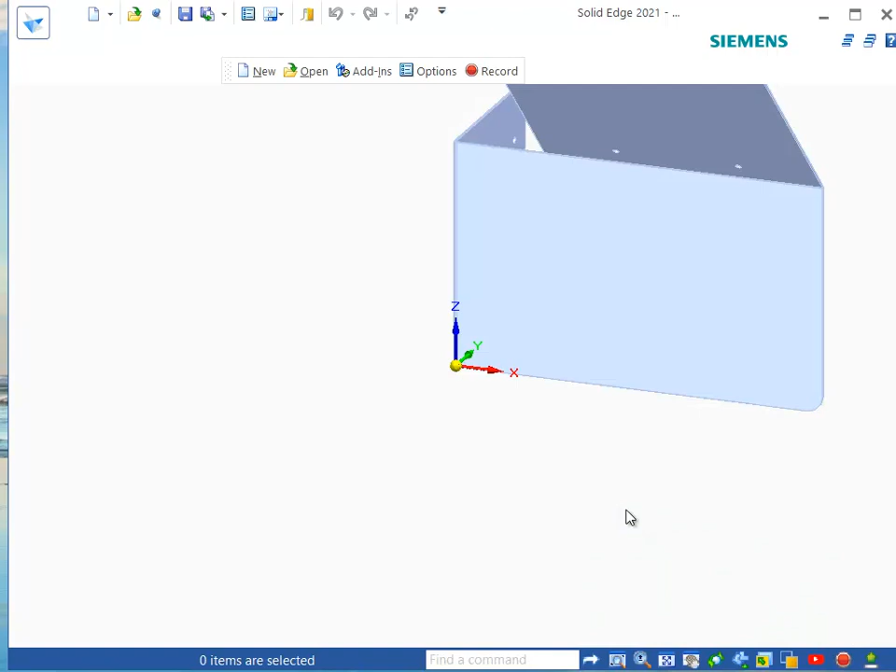Okay, now we got this simple sheet metal part that was created in SolidWorks, brought in through the Parasolid, and now it lands in Synchronous. We can just tell it to make this thin part. We're assuming that it has an equal thickness all the way around.

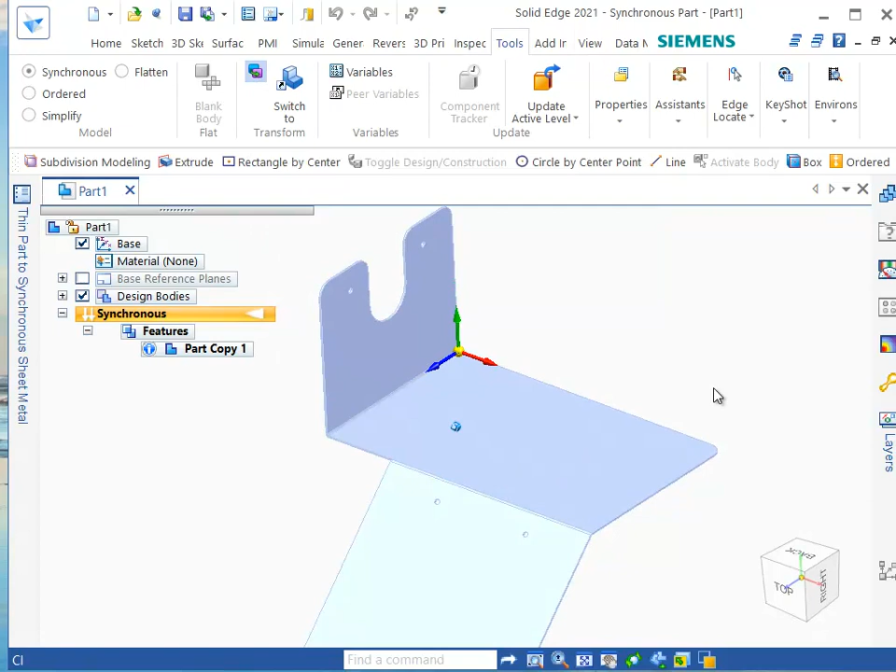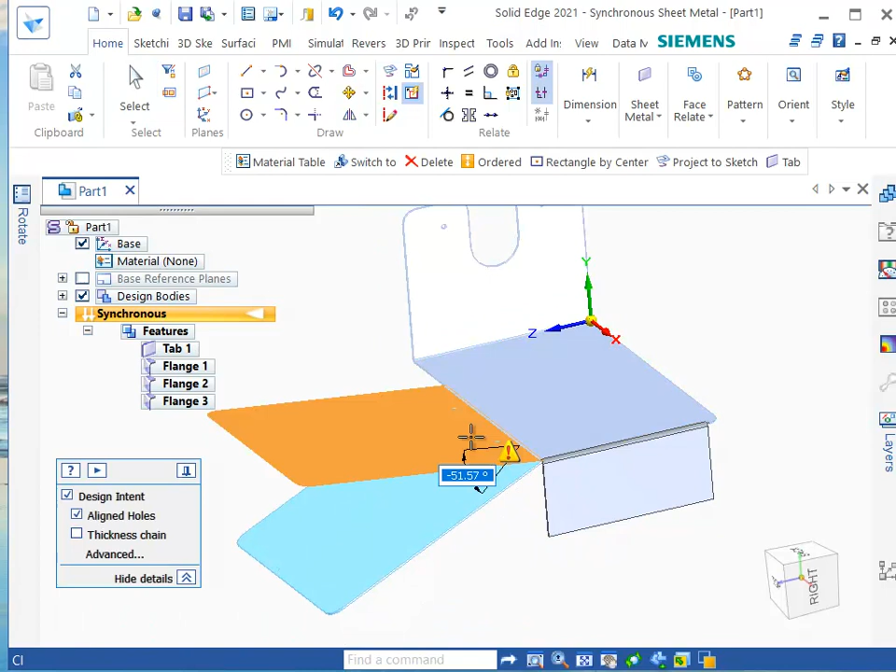Tell it to make it into synchronous sheet metal, and so now we should be able to grab an edge here and pull a flange. Okay, or we can grab a face like this, reorient the steering wheel, and change the direction of the flange. Okay, and the holes go with it.

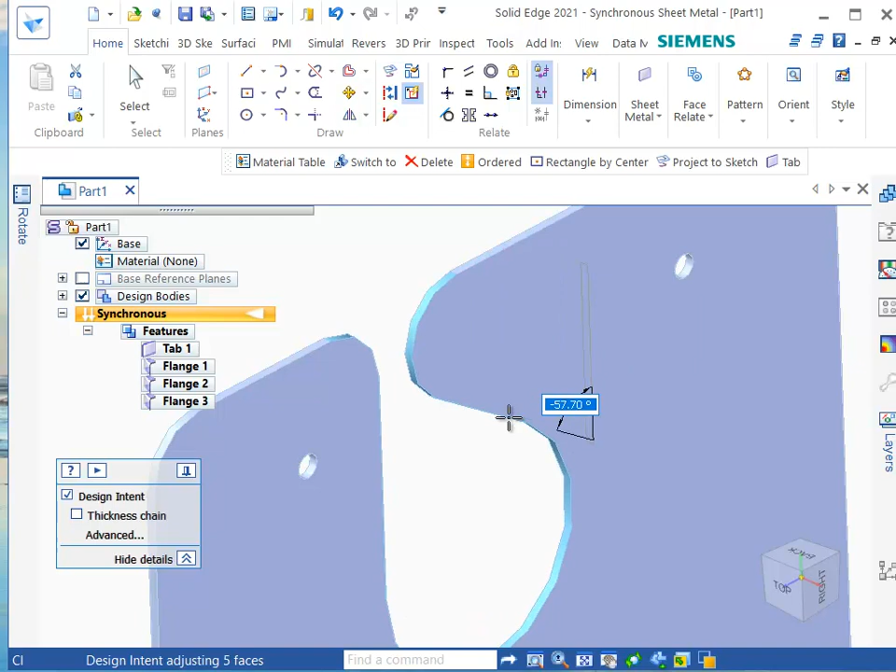Okay, we can make any sort of changes we want to this sheet metal part. We could add a flange there if we want, or what I want to do here is change the angle of this face. You can also change this dimension. So if we make this 0.3 instead, all of the tangent follows with it.

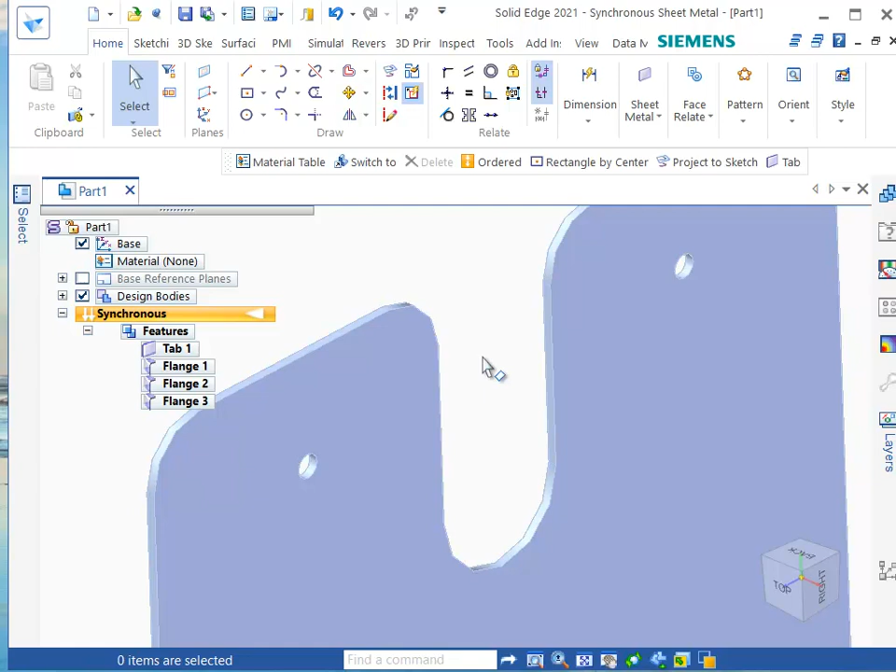That's something that you're going to have a very hard time doing with an imported part in SolidWorks, especially with these tangents on it. In any case, I just wanted to show you that, and we can be done.